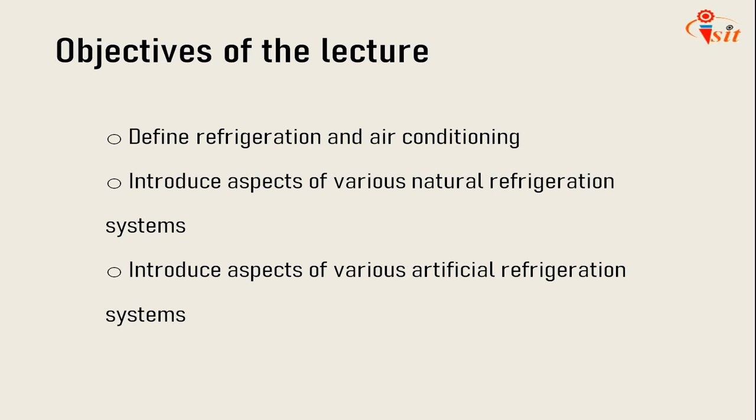Today's lecture objectives are defining refrigeration and air conditioning, introduce aspects of various natural refrigeration systems, and introduce aspects of various artificial refrigeration systems.

Today we will cover the following points, that is introduction, natural refrigeration, in that nocturnal cooling, evaporative cooling, cooling by salt solutions. Second category, that is artificial refrigeration, in that vapor compression refrigeration system, air conditioning system and vapor absorption system.

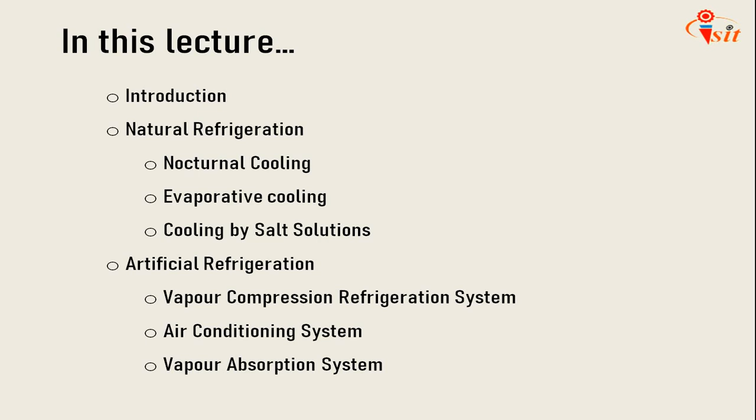Introduction. Refrigeration may be defined as the process of achieving and maintaining a temperature below that of the surroundings, the aim being to cool some product or space to the required temperature. One of the most important applications of refrigeration has been the preservation of perishable food products by storing them at low temperatures.

Refrigeration systems are also used extensively for providing thermal comfort to human beings by means of air conditioning. Air conditioning refers to the treatment of air so as to simultaneously control its temperature, moisture content, cleanliness, odor and circulation as required by occupants, a process or products in the space.

The subject of refrigeration and air conditioning has evolved out of human need for food and comfort, and its history dates back centuries. The history of refrigeration is very interesting since every aspect of it, the availability of refrigerants, the prime movers, the developments in compressors and the method of refrigeration, all are a part of it.

For specific applications, efficiencies of both living and non-living beings depend to a great extent on the physical environment. Nature keeps conditions in the physical environment in a dynamic state ranging from one extreme to the other. Temperature, humidity, pressure and air motion are some of the important environment variables that at any location keep changing throughout the year. Adaptation to this many times unpredictable variation is not possible, and thus working efficiently is not feasible either for the living beings or the non-living ones.

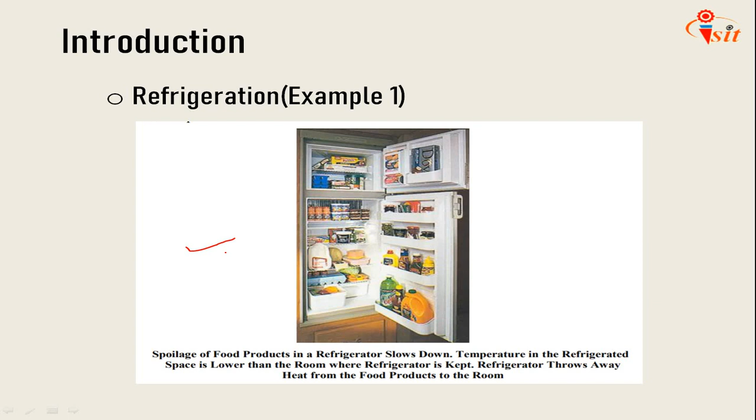As a second example, let us consider travel in a car in an Indian summer of Delhi or Kanpur. The outside temperature is very high. It is highly uncomfortable. For a comfortable drive, nowadays we have air-conditioned cars. You will come to know that refrigeration is an integral component of air conditioning.

To have a comfortable drive in the car, the temperature inside the car has to be lowered from approximately 40 degrees Celsius to 25 degrees Celsius. This means that the heat of the space inside of the car and its occupants has to be thrown outside. This is done by the refrigeration unit fitted in the car.

The volume of the car is much less than that of the surroundings. With the rejected heat, there is an appreciable change in the temperature inside the car, but no change in the temperature of the surrounding. In many places and situations, environment temperature is lower than the temperature of the space that we desire. As an example, consider car driving in the winter of Delhi or Kanpur.

Temperature outside is about 2 to 6 degrees Celsius. For a comfortable drive with light clothing, temperature inside the car has to be raised to 25 degrees Celsius. This means that heat has to be supplied or pumped inside the car and its temperature has to be increased. The machinery that performs this operation is known as heat pump.

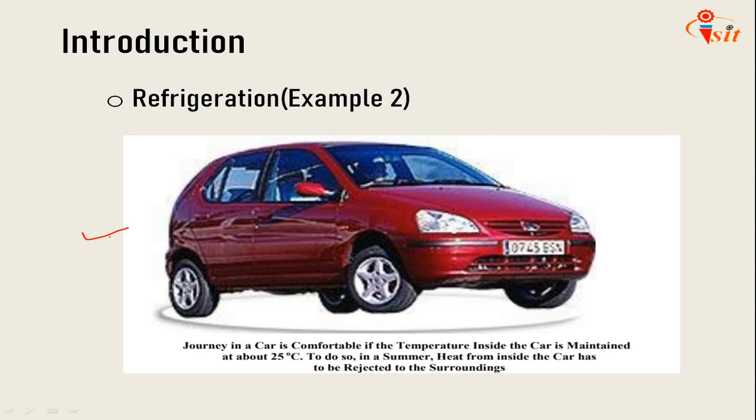The figure shows journey in a car is comfortable if the temperature inside the car is maintained at about 25 degrees Celsius. To do so, in a summer, we need to reject heat from the car to the surrounding. Okay, so that will lower the temperature down to 25 degrees Celsius.

Let's go for the third example. In refrigeration, heat is pumped out from a lower temperature space to a higher temperature environment. We know from our experience in daily life that water flows from a higher level to a lower level and heat flows from a body at a higher temperature to a lower temperature.

The reverse, that is flow of water from lower level to a higher level and flow of heat from a body at a lower temperature to a higher temperature, do not occur naturally. In practice, these are achieved at a cost of external work. We need an external device or power done on the water and the carrier of heat with the help of a mechanical device.

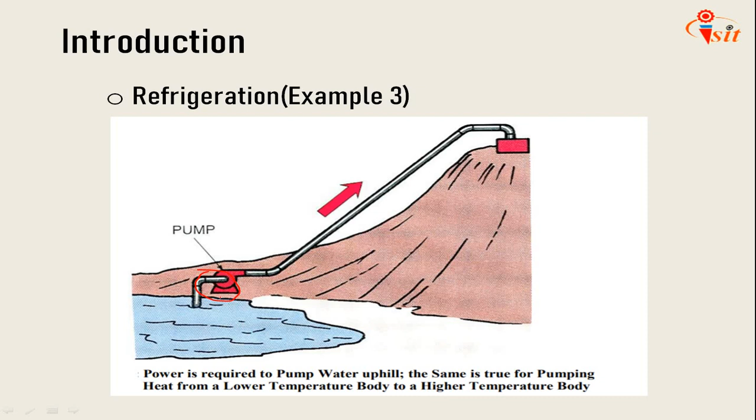Whether the space under consideration has to be maintained at a temperature lower or higher than the surrounding environment, to pump out or in the heat, external power is always required. In relation to heat pump, the figure is showing the power required to pump the water. The same is required for the heat from a lower temperature body to a higher temperature body. We need an external device or work to perform the same.

Next point is about air conditioning. Lowering or raising the temperature does not provide comfort in general to the machines or its components and living beings in particular. In case of the machine components, along with the temperature, humidity also has to be controlled. For the comfort of human beings, along with these two important parameters, air motion and cleanliness also play a vital role.

Air conditioning is a broader aspect which looks into the simultaneous control of all physical parameters which are essential for the comfort of human beings or animals or for the proper performance of some industrial or scientific processes. The precise meaning of air conditioning can be given as the process of simultaneous control of parameters such as temperature, humidity, cleanliness and air motion.

These four parameters are very much important in order to go for a process of air conditioning. In some applications, even the control of air pressure falls under the purview of air conditioning. It is noted that refrigeration, that is control of temperature, is the most important aspect of air conditioning.

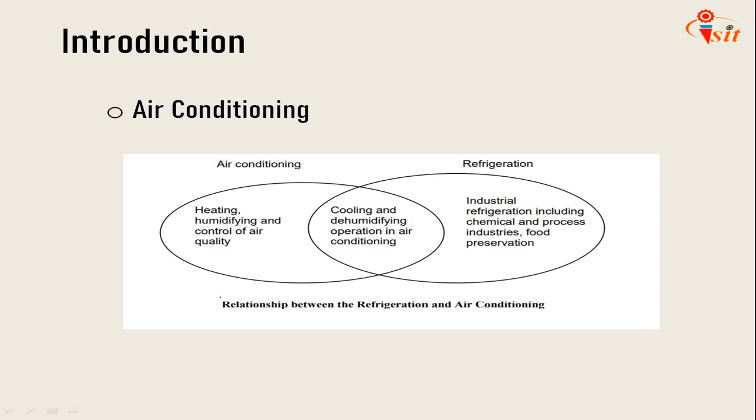So here the figure shows the relationship between refrigeration and air conditioning, which will clear your doubts about air conditioning. The next slide is about natural refrigeration. There are three categories under natural, that is nocturnal cooling, evaporative cooling and cooling by salt solution. We will go one by one.

In olden days, refrigeration was achieved by natural means such as the use of ice or by evaporative cooling. In earlier times, ice was either transported from colder regions, harvested in winter and stored in ice houses for summer use, or made during night by cooling of water by radiation to the stratosphere. In Europe, America and Iran, a number of ice houses were built to store ice. Materials like sawdust or wood shavings were used as insulating materials in these houses. Later on, cork was also used as an insulating material.

Literature reveals that ice has always been available to anyone who could afford it. In India, the Mughal emperors were very fond of ice during the harsh summer in Delhi and Agra, and it appears that the ice used to be made by nocturnal cooling. In 1806, Frederick Tudor, also called the ice king, began the trade in ice by cutting it from the Hudson River and the ponds of Massachusetts and exporting it to various countries including India. In India, Tudor's ice was cheaper than the locally manufactured ice by nocturnal cooling.

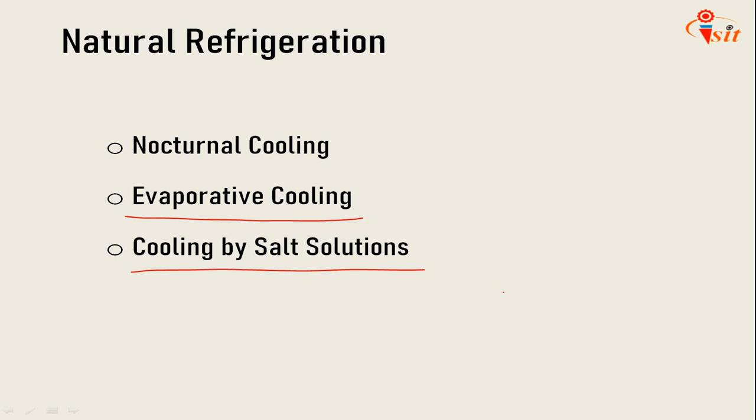Then the next category is about artificial refrigeration. So previously we have seen the natural refrigeration by these three methods: nocturnal, evaporative and cooling by salt solution. These are categories under natural refrigeration. And after the advent of technologies, we are heading towards artificial refrigeration. So artificial refrigeration, as it is known these days, is produced by artificial means.

Though it is very difficult to make a clear distinction between natural and artificial refrigeration, it is generally agreed that the history of artificial refrigeration began in the year 1755 when the Scottish professor William Cullen made the first refrigerating machine which could produce a small quantity of ice in the laboratory. Based on the working principle, the refrigeration system can be classified as vapor compression refrigeration system, vapor absorption refrigeration system, etc. The first one is the vapor compression refrigeration system.

The basis of modern refrigeration is the ability of liquids to absorb enormous quantities of heat as they boil and evaporate. Professor William Cullen of the University of Edinburgh demonstrated this in 1755 by placing some water in thermal contact with ether under a receiver of the vacuum pump. The evaporation rate of ether increased due to the vacuum pump and water could be frozen. This process involves two thermodynamic concepts, the vapor pressure and the latent heat.

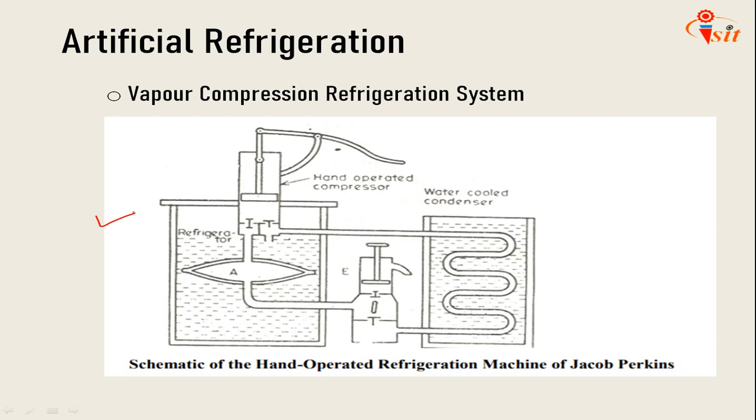Charles Tellier of France patented in 1864 a refrigerant system using dimethyl ether, which has a normal boiling point of minus 23.6 degrees Celsius. Then the next category is air conditioning systems. Refrigeration systems are also used for providing cooling and dehumidification in summer for personal comfort. The first air conditioning systems were used for industrial as well as comfort air conditioning.

Eastman Kodak installed the first air conditioning system in 1891 in Rochester, New York for the storage of photographic films. An air conditioning system was installed in a printing press in 1902 and in a telephone exchange in Hamburg in 1904. Many systems were installed in tobacco and textile factories around 1900.

The first domestic air conditioning system was installed in a house in Frankfurt in 1894. A private library in St. Louis, USA was air conditioned in 1895, and a casino was air conditioned in Monte Carlo in 1901. Efforts have also been made to air condition passenger rail coaches using ice.

The widespread development of air conditioning is attributed to the American scientist and industrialist Willis Carrier. Carrier is the company that is known with Willis Carrier. Carrier studied the control of humidity in 1902 and designed a central air conditioning plant using an air washer in 1904.

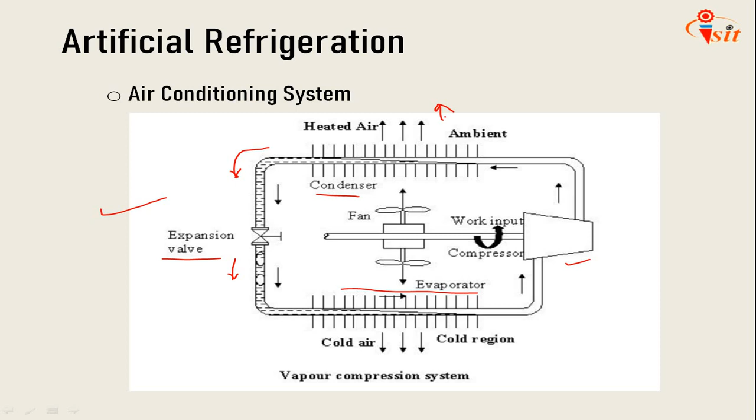The third category under artificial refrigeration is the vapor absorption system. John Leslie in 1810 kept H2SO4 and water in two separate jars connected together. H2SO4, as we know, has a very high affinity for water. It absorbs water vapor, and this becomes the principle of removing the evaporated water vapor, requiring no compressor or pump. H2SO4 is an absorbent in the system that has to be recycled by heating to get rid of the absorbed water vapor for continuous operation.

Windhausen in 1878 used this principle for an absorption refrigeration system, which worked on H2SO4. Later, Ferdinand Carré invented the aqua ammonia absorption system in 1860. Water is a strong absorbent of NH3. If NH3 is kept in a vessel that is exposed to another vessel containing water, the strong absorption potential of water will cause evaporation of NH3, requiring no compressor to drive the vapors.

A liquid pump is used to increase the pressure of the strong solution. The strong solution is then heated in a generator and passed through a rectification column to separate out the water from the ammonia. The ammonia vapor is then condensed and recycled. Here the pump power is negligible, hence the system runs virtually on low grade energy used for heating the strong solution to separate the water from the ammonia.